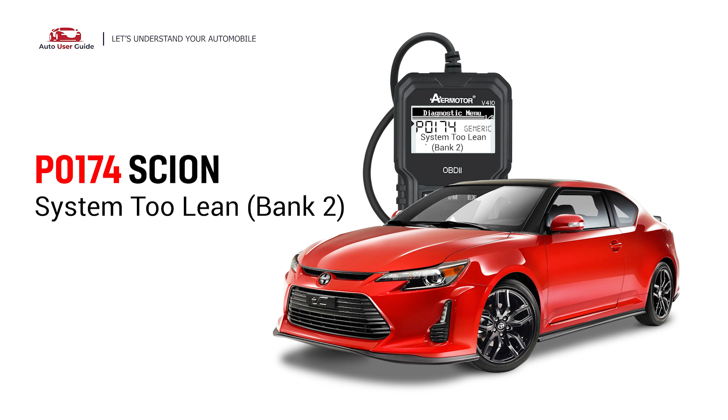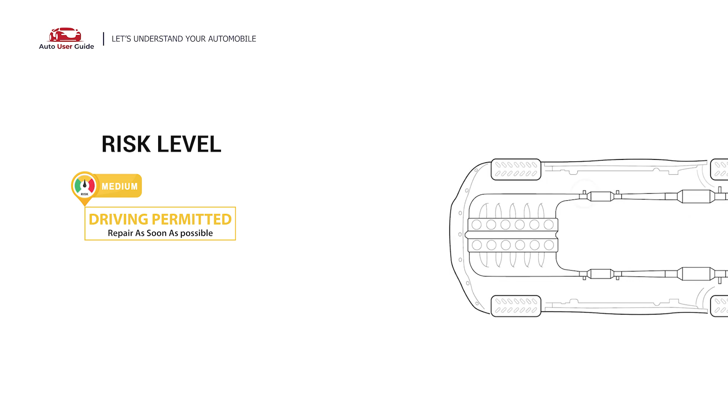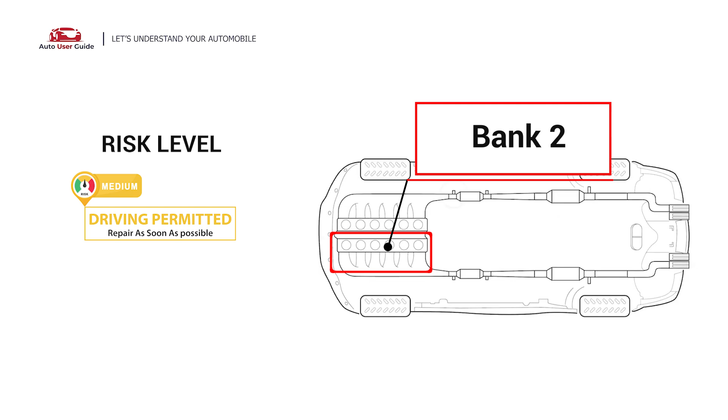P0174 is a diagnostic trouble code that stands for System Too Lean in Bank 2. This engine code signifies that the vehicle's engine control module has detected a System Too Lean condition on cylinder bank 2. Under this circumstance, short-distance driving is permitted, but your vehicle should be repaired as soon as possible.

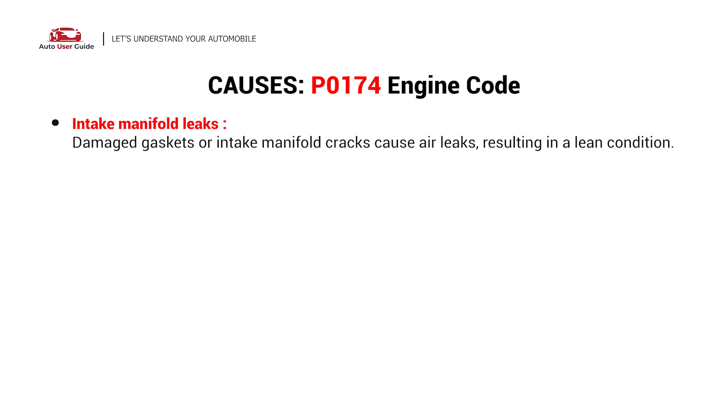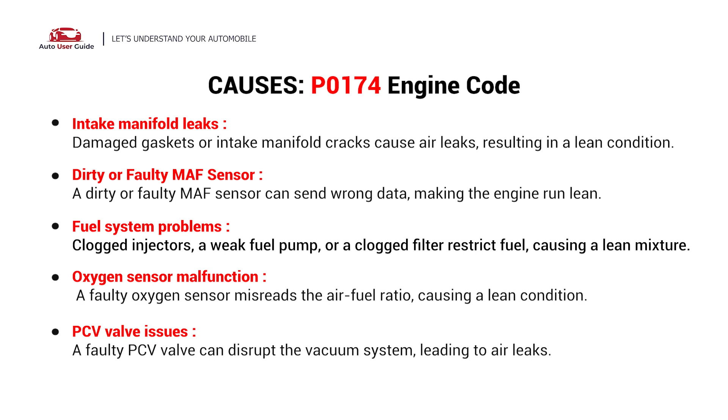So what causes this imbalance? Here are the most common culprits. This error could be caused by these possible faults in your car: intake manifold leaks, dirty or faulty MAF sensor, fuel system problems, oxygen sensor malfunction, PCV valve issues, fuel pressure regulator problems, faulty fuel pressure sensor, and exhaust leaks.

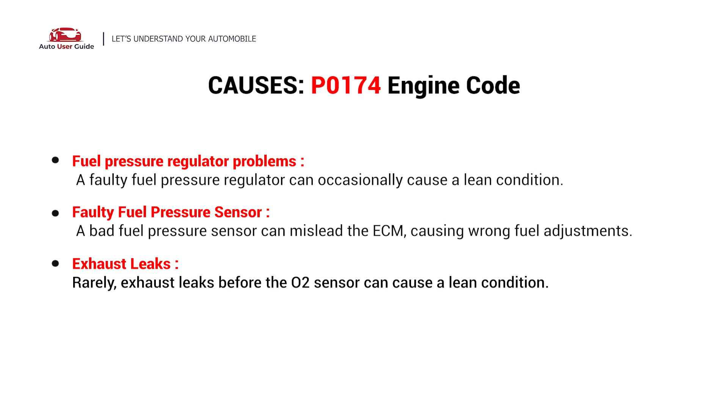Here are two simple DIY methods you can try to solve this problem. First, the MAF sensor.

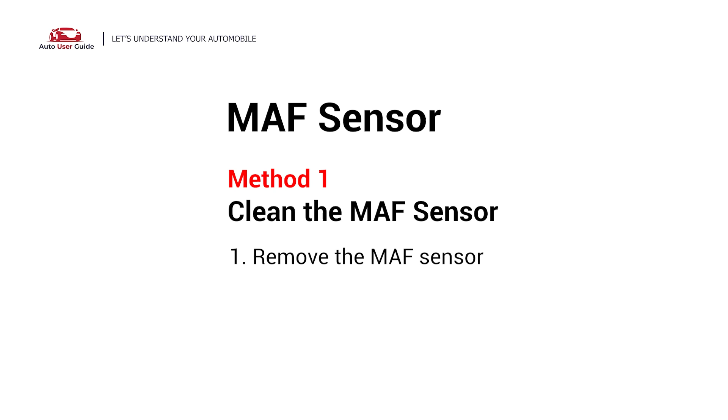Carefully remove the MAF sensor from your car and do a quick inspection around the wire. Inside often gets dirty and needs to be cleaned. You can spray the MAF sensor cleaner onto the wire perpendicularly to the ground so that it won't damage the MAF sensor. Reinstall the MAF sensor back in the car after it gets dry.

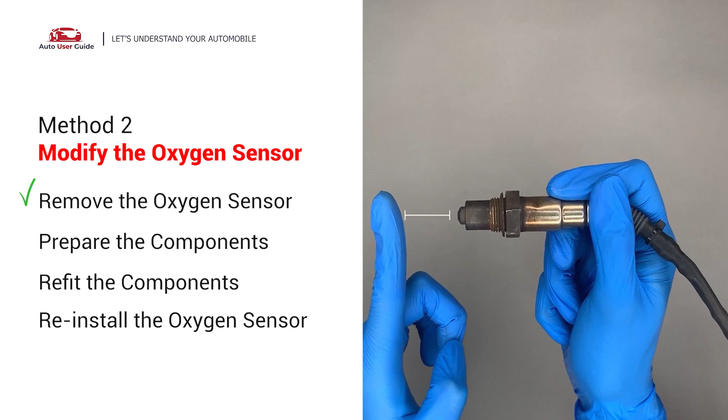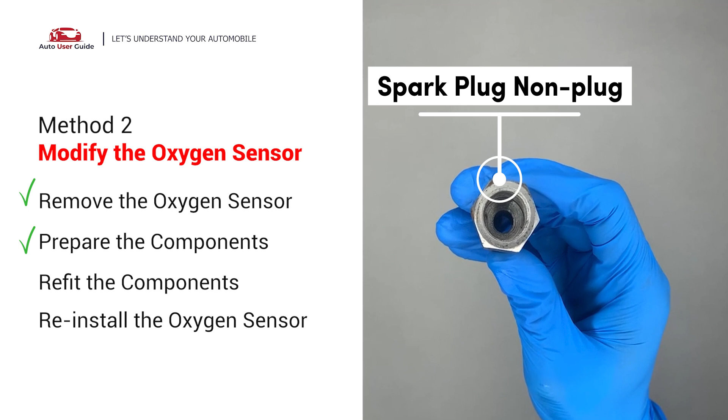Next, modify the oxygen sensor. You can remove the oxygen sensor from the converter by putting extra space between the sensor and the converter. Now getting the spark plug non-fouler, there is enough space to fit into the oxygen sensor, and then use a 1/2-inch drill to refit it. By doing this, put them together and put back on the catalytic converter.

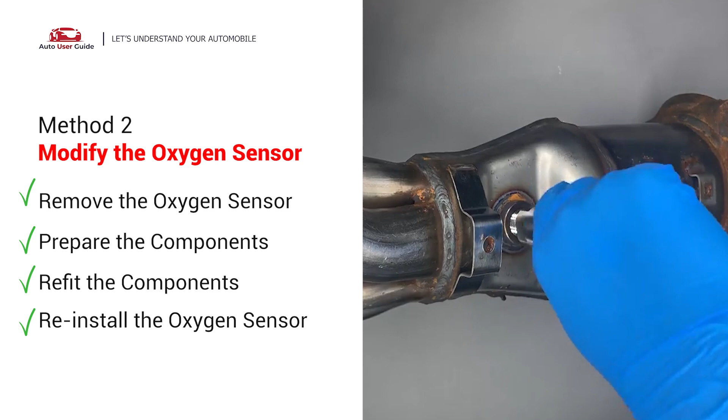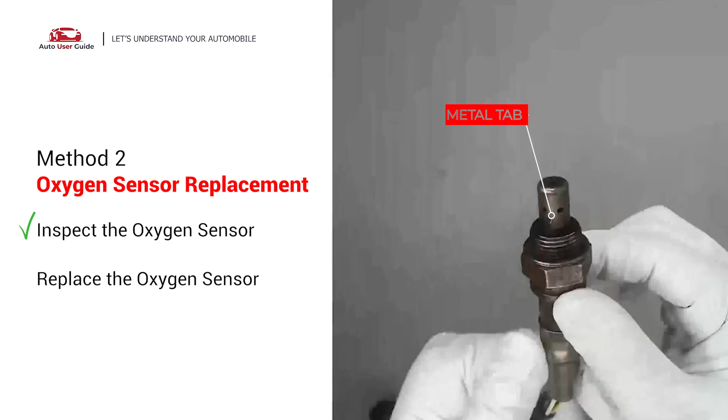Oxygen sensor replacement: carefully remove the oxygen sensor from the catalytic converter and visually check the oxygen sensor electrical connections, wire harness, and metal tabs for any damages. If damages are found, then replace the oxygen sensor.

This engine code appears in various vehicles, mostly in Toyota, Honda, Lexus, Acura, and Scion.